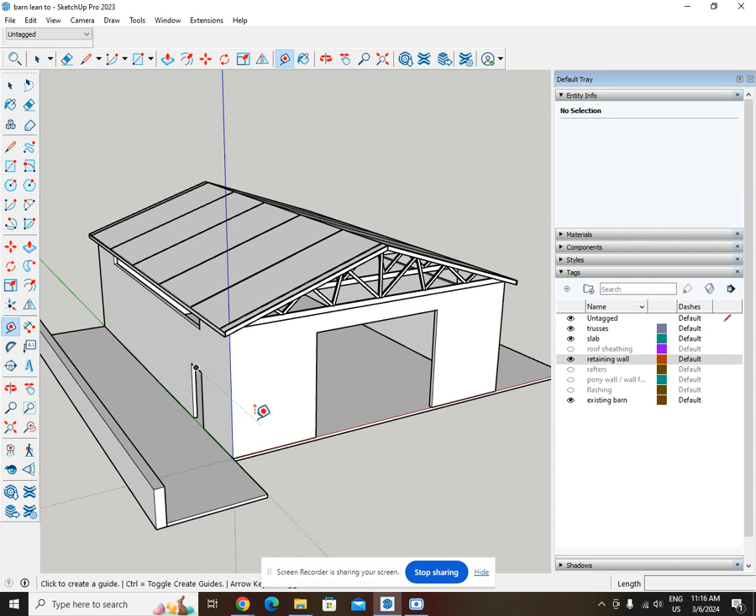Okay, this is a lean-to. It's going to be a lean-to on this existing workshop, pole barn style construction. So I have not drawn the metal siding or the metal roofing. This is just the necessary parts to show what I'm adding on here.

So the existing barn, as shown, measures 36 wide by 48 long. And then we have 14 feet to the ceiling. And then over here, I've just drawn this as an opening, but what this is, those translucent wall panels so the light can go through.

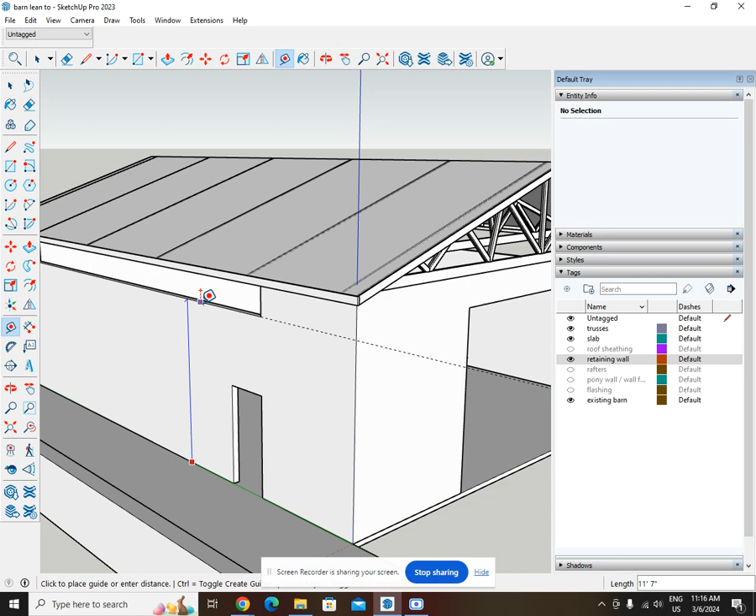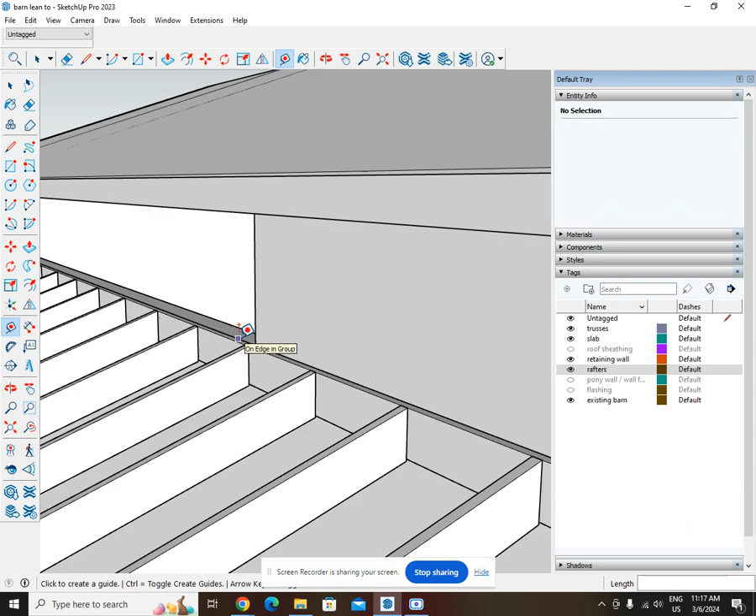Anyway, it measures 11 foot 7, which is 139 inches. So now we're trying to see if a 4/12 roof is going to work with a possibility for a 7'6" opening. So let's go ahead and turn on the framing. There's the rafters. Now, if I'm all the way up as high as I can go, and those rafters are on a 4/12,

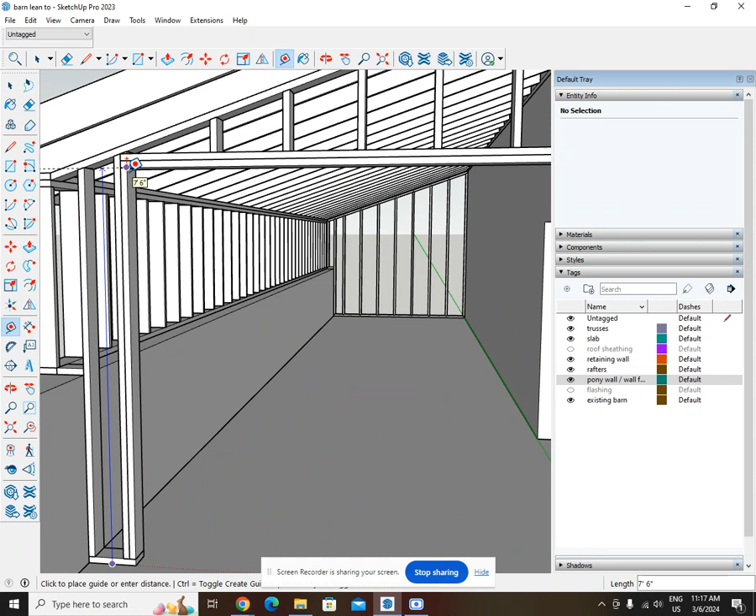and I turn on the wall framing, that right there is how it would get framed in the future if the slab is extended out here at the same elevation. And then with the framing here, that there is 7'6". Now, I guess I don't really want to try to squeeze more inches out of that and eliminate more framing, eliminate any framing. I don't want to do that because then I just feel like it's going to be weaker there. So that right there, as drawn on the framing, is basically as high as I feel comfortable going up.

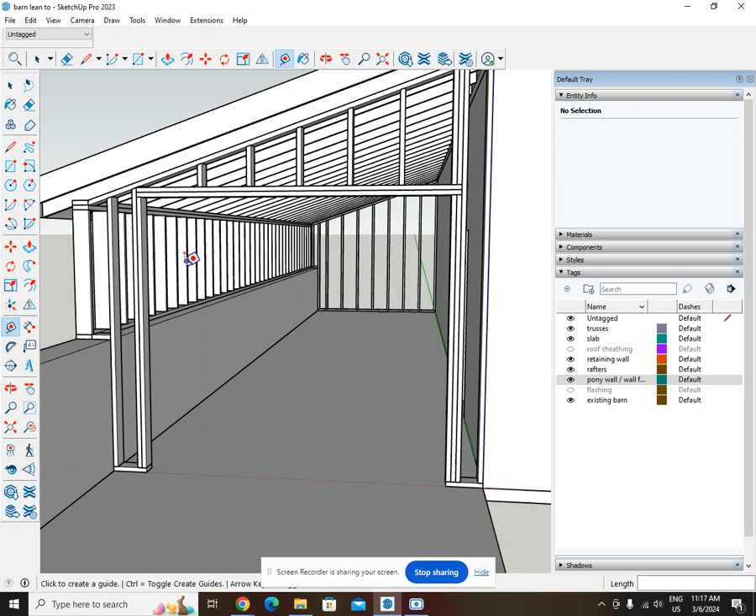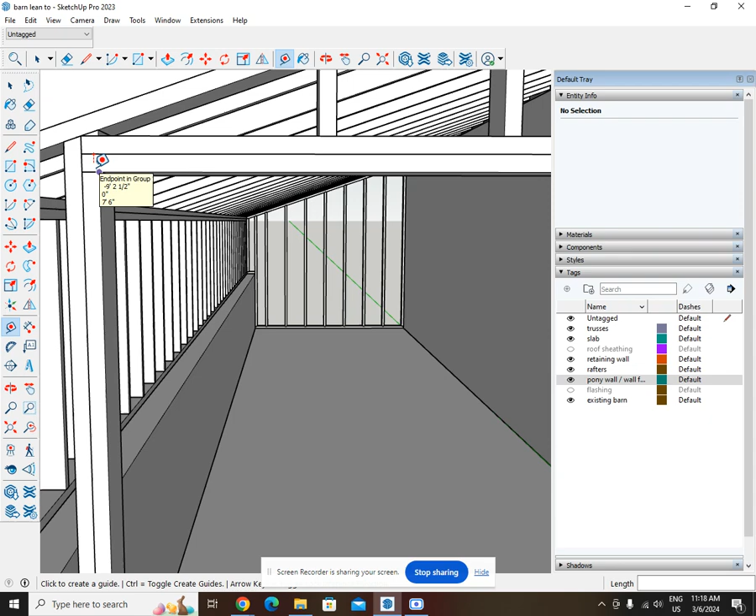Okay, so there's this 7'6". Again, we'll show that. 7'6" right there. Okay, so hopefully the garage door installers on this side are able to do something with their track where they're okay with like 3 to 4.5 inches, which would be to the bottom of the rafters, okay, type thing. 5 inches, whatever that comes out to be, okay.

So then these rafters are 2x8s. I'm going on the record as saying I'm not comfortable with 2x6 rafters on this span. I just think it's going to be too spongy. And so I'm thinking a 2x8 is better. So, of course, it's not my project. I'll do it however the owner wants. If he wants 2x6s there, that's fine. But I'm just going on the record by saying I think a 2x8 is better.

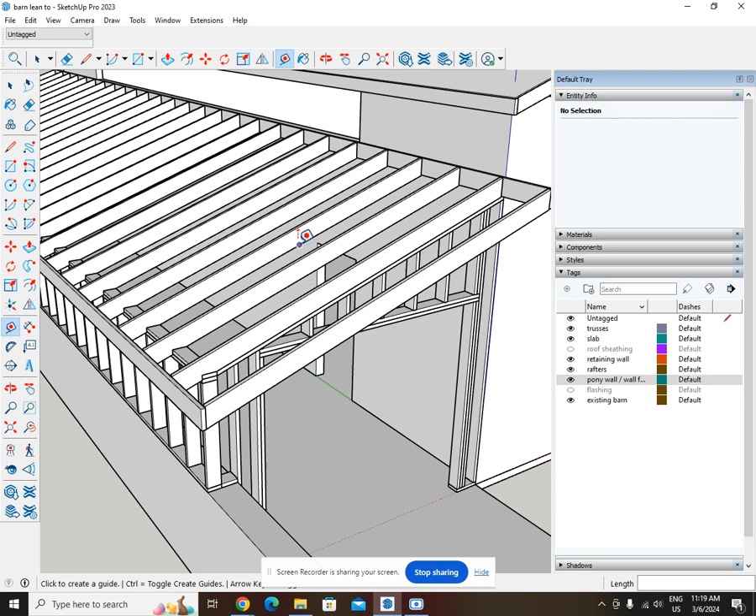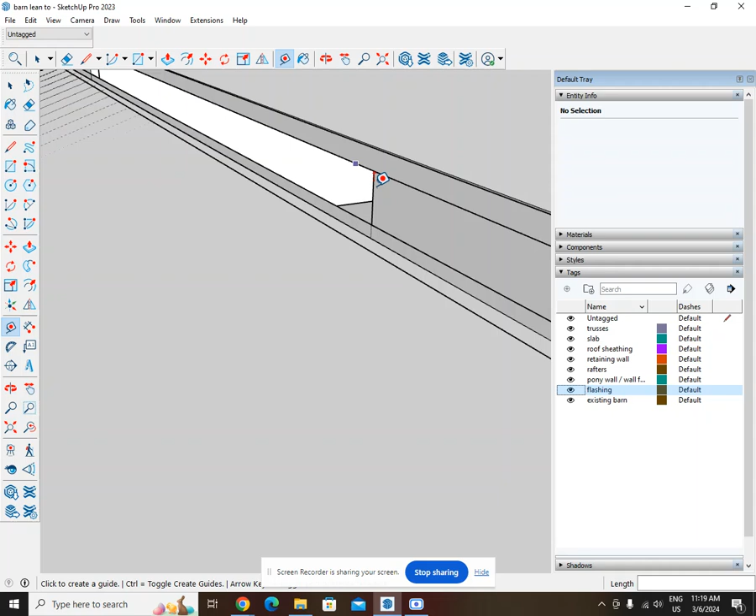So once the roof gets sheeted, it's going to look like this with just the OSB. And then with the flashing, there's going to be a piece of flashing here. And that flashing is going to take up, I think that's 4 inches right there. So that's going to be taking up like 4 inches of daylight right there.

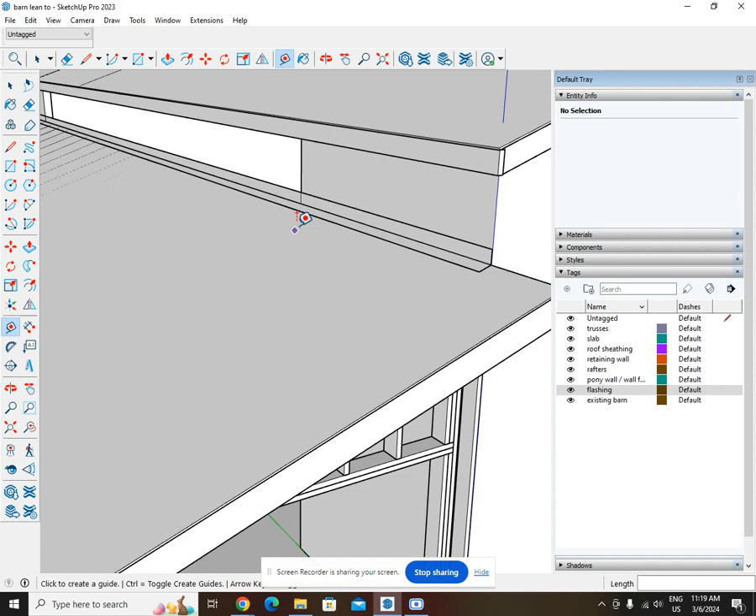But I think that's the best way to do the flashing because that way those translucent panels just get applied right back as they were and they lap over that flashing. And of course, the flashing is even going to be a little bit higher than that because of the ribs on the metal roofing. So if that's acceptable, then this 4/12 would work, but it is going to be eating a few inches out of that daylight. So just keep that in mind.

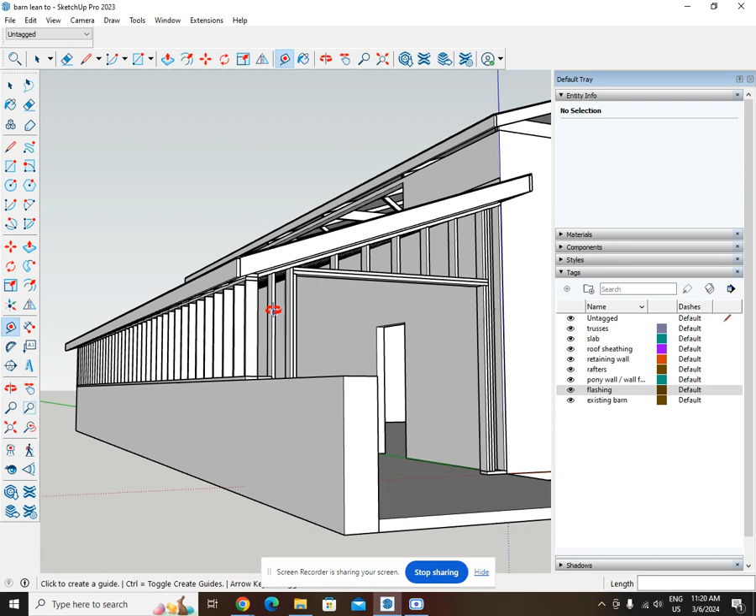Now, this was drawn as posts, but I remember from the conversation that this was going to be framed in at a later date. So my view is why not just frame it in right now with a pony wall? Because framing in with a pony wall gives us the opportunity to anchor without having special L-shaped anchors bent up or any other anchoring method. We just either do wedge anchors here, maybe every 2 stud bays, or epoxy threads in.

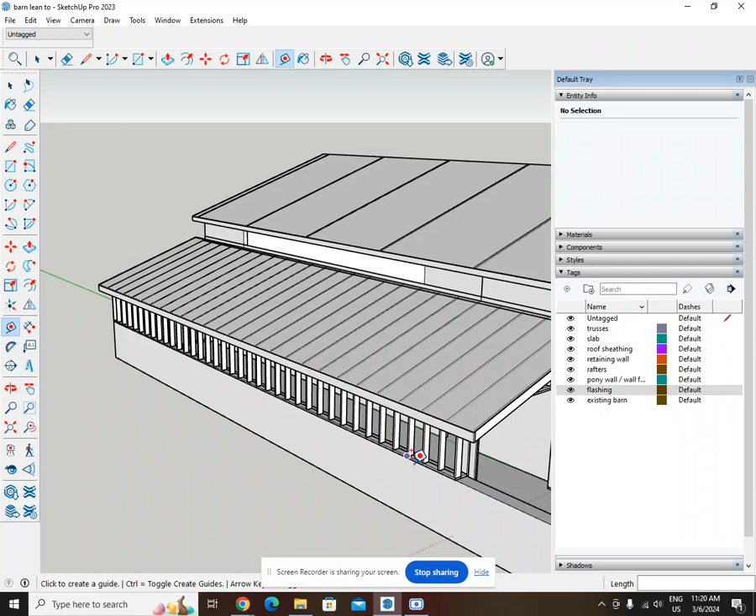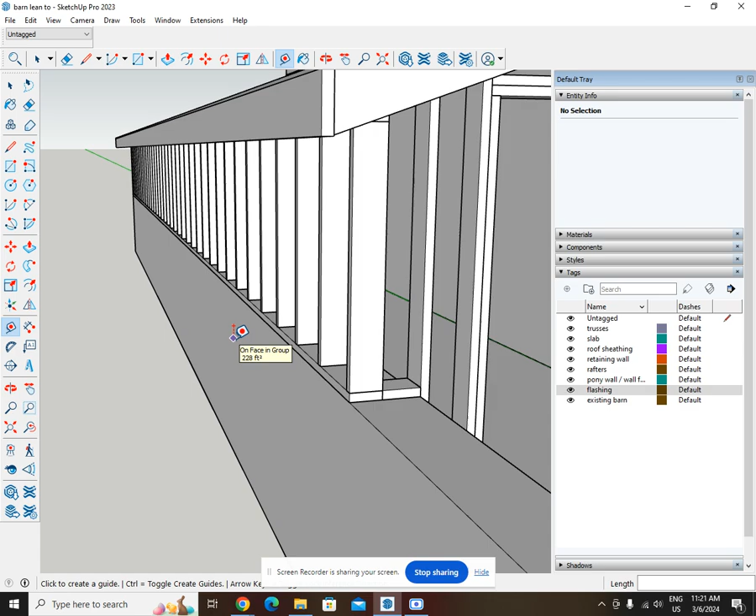I chose to bring the wall out flush with the outside of the retaining wall. The retaining wall is plenty thick, 12 inches thick, but I think the best place to put it is the outside. If I'm moving it towards the center or the inside edge, any rain or snow that hits it is going to creep into the lean-to area. So if we put the wall flush with the outside, by the time the metal siding goes on, it's going to overlap and the water's not going to get in right there.

On the back wall, it's just framed in for possibly in the future, just like the front wall, but it doesn't have an opening. So that's how I think that'll work.

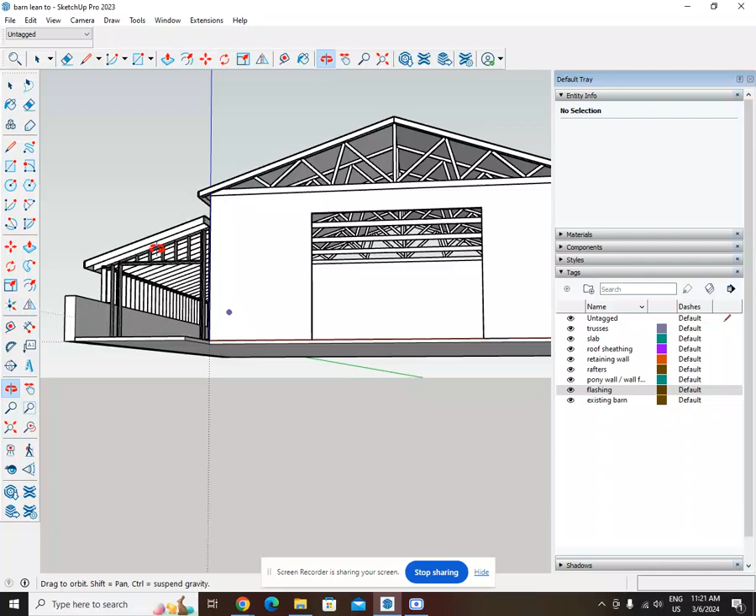If that's acceptable, we can proceed with the 4/12 roof. If it's not acceptable up there by cutting down into the daylight, then I think we need to change this to a 3/12, drop the flashing down, drop the roof down, put it on a 3/12 pitch, and see if that works.

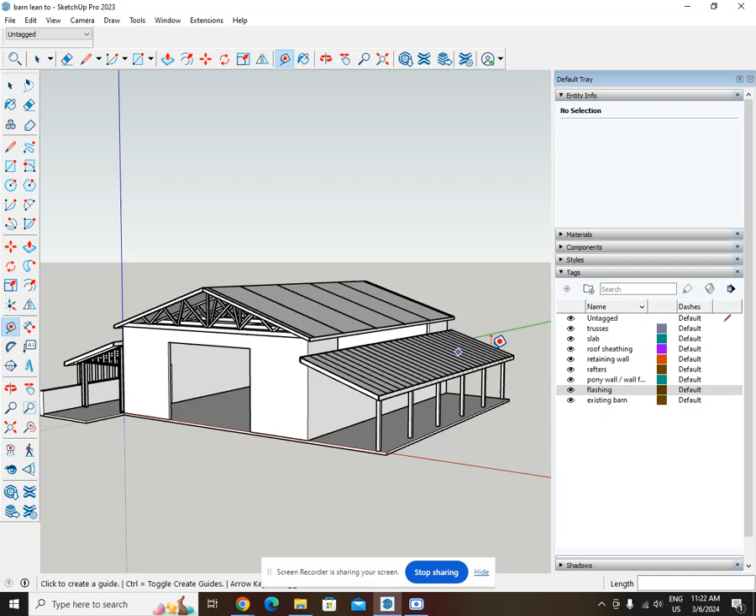So the other side is going to look like this. It's going to be symmetrical, and it's going to match.

Let's get the camera view on for the front. So there's the front view. Now let me do my camera on the ortho - see if I remember how to do the ortho. Oh, the parallel, there we go, the parallel projection.

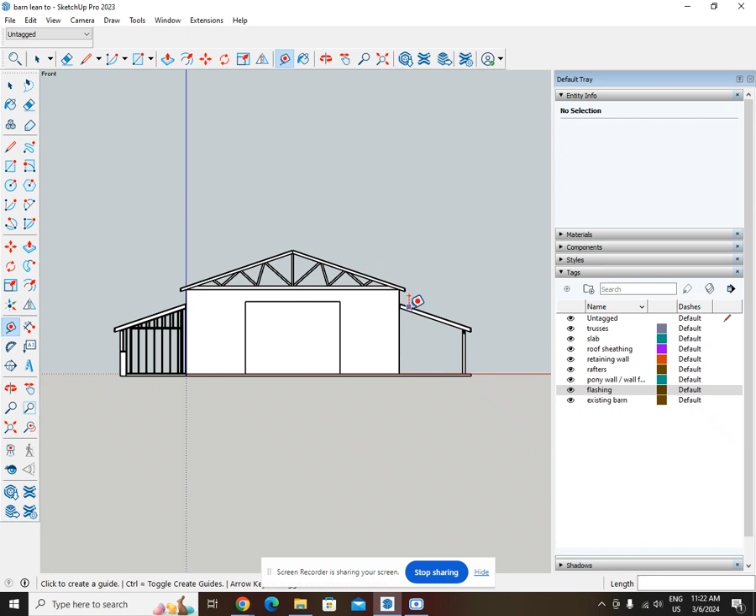I like the way the 4/12 looks there, it matches. But again, the determining factor, the limiting factor, is going to be whether or not it's acceptable to encroach several inches on the daylight that is now entering the barn from the daylight panels above.

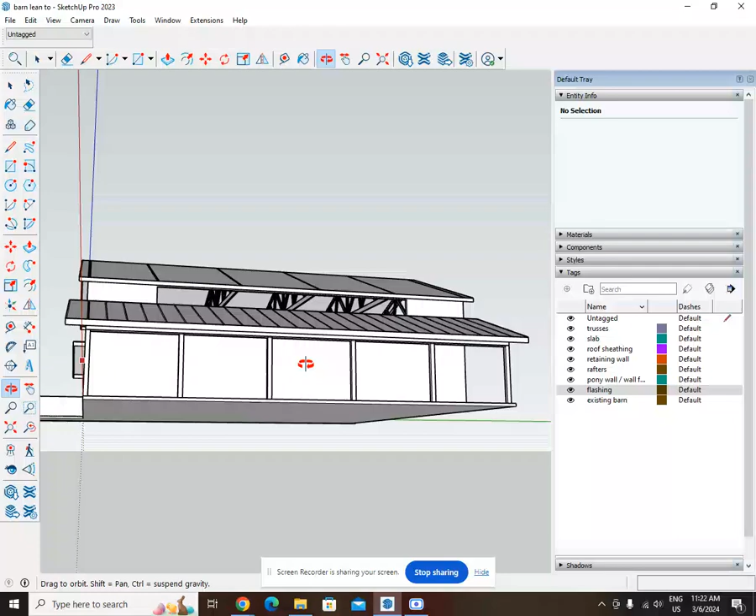So these posts over here are just spaced out evenly. And how I'm planning the connection, I was just going to do a 2x8 double beam across there. And these posts right here, you can't really tell, okay, this is a better example.

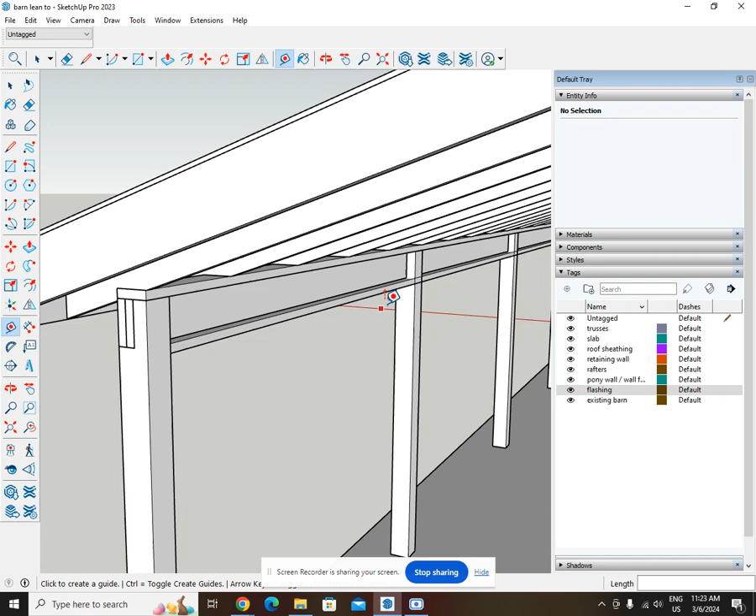What I need to do is finish cutting this out, and let's just cut this out right now so that's more accurate.

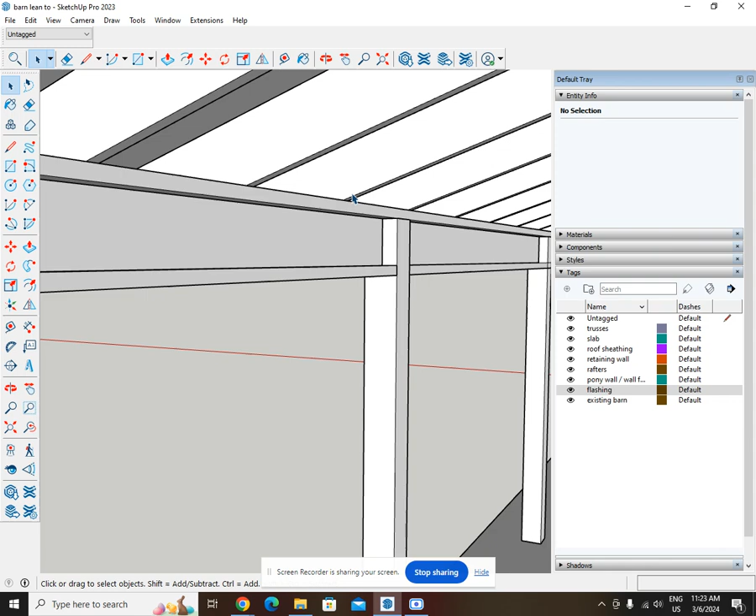All right, so that's how that would be on every single one of them. I want the posts to go all the way up because that gives the opportunity for anchoring, like with lag screws or whatever. And then these would have some kind of either a screw up from the bottom or like a hurricane tie.

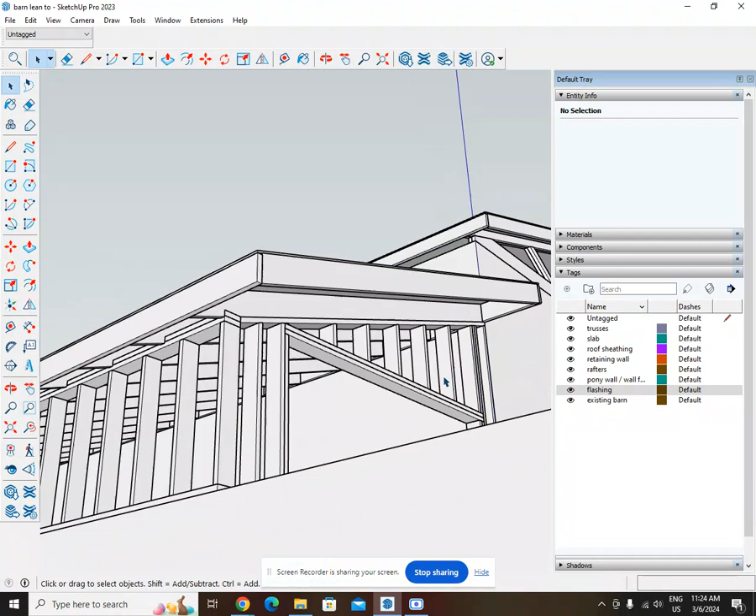And then how this is all anchored into the building is with this 2x8 ledger, and that would be lagged into wherever the posts are on the building, like every 10 foot, that would be lagged in right there. And then the same thing over here, find the posts, lag in, lag in, lag in. I don't think the hangers are necessary up here.

I think with just 3 toenails on each side, that would be fine. But that's really something that can be decided later.

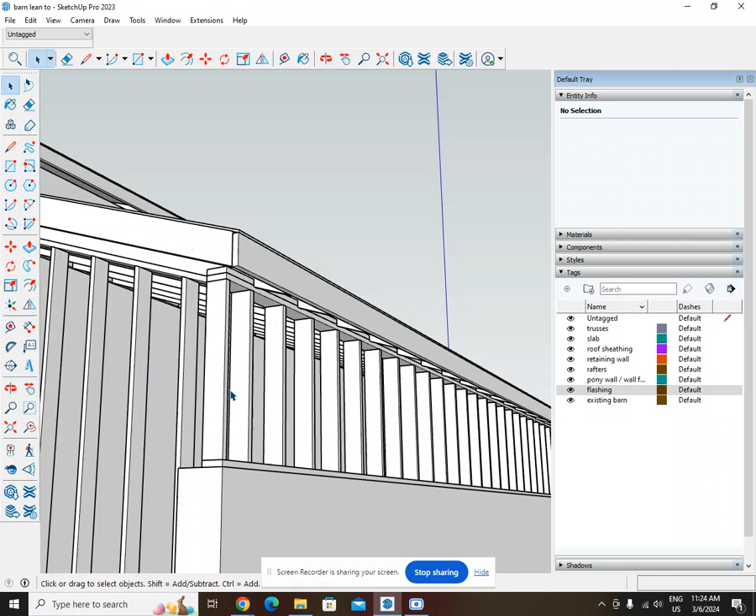Over here, I was planning on sheeting this wall just like a house wall, with OSB, and then putting an uplift hanger on the outside here.

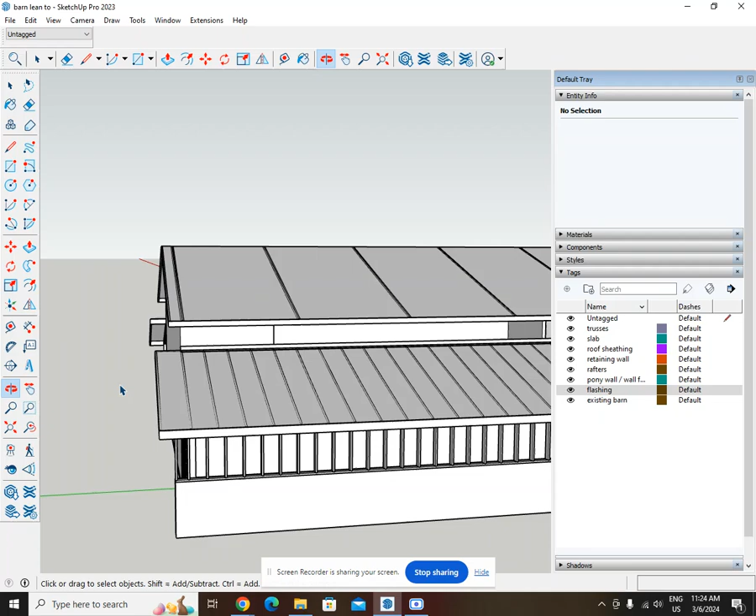This shows the 1 foot eave overhang. The existing barn has the 1 foot overhang, and the lean-to has the 2 foot overhang. So this upper roof doesn't have to get rain gutters at all, just drain down to the lower roof. This roof right here is where the rain gutters are going to be. The owner has already done the rainwater collection system for the downspouts along this retaining wall.

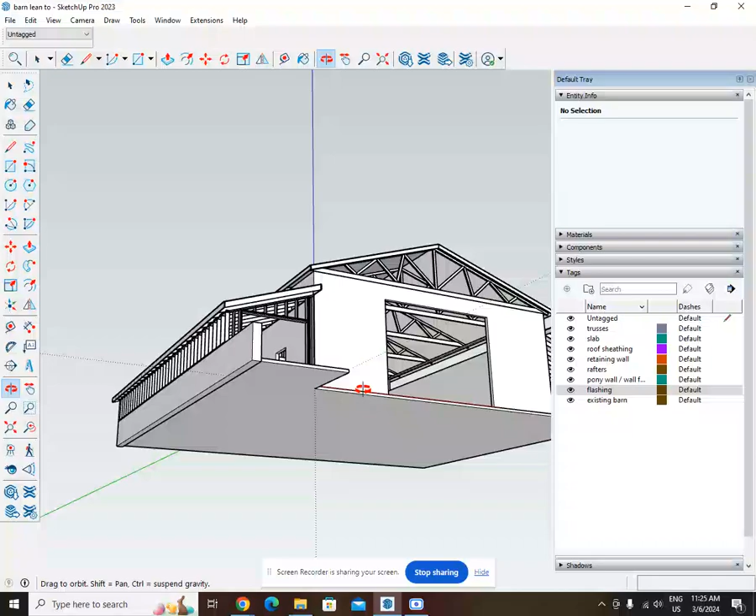So I'm just waiting for some feedback to see if these are acceptable clearances. And if not, then we'll redesign.